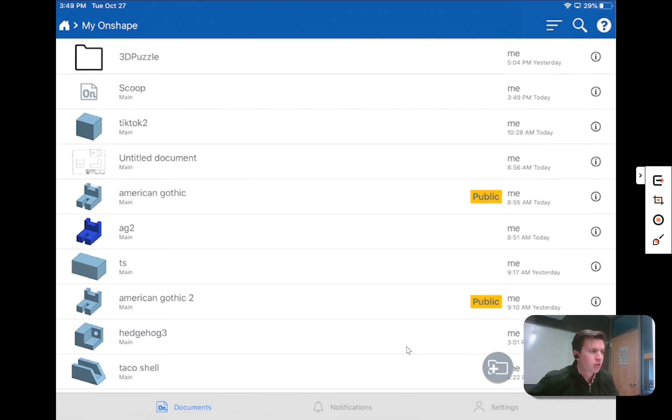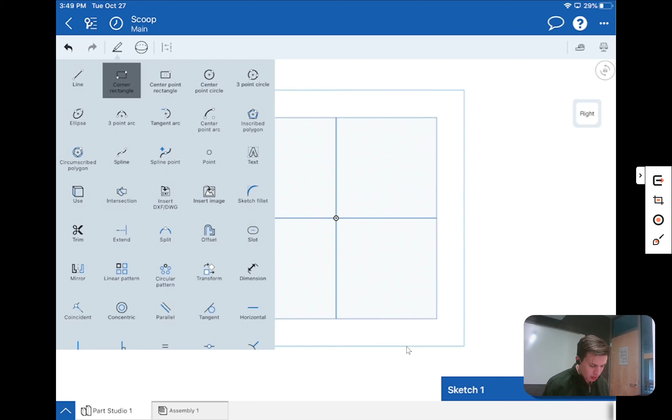So I am gonna start by drawing a big old rectangle, and I'm gonna draw that on my right side face, and I'll show you why in just a second. So let's start with our sketch tool and view normal to plane, and start with a rectangle at our origin and drag that out. All right, now let's refer back to the drawing so that we can get those dimensions.

So what I am drawing right now is this mystery rectangle right here. You see how it's just these light lines, meaning that they are only there as references. They are not visible lines, which are these dark black lines over here. So let's draw these. It is 2 and 1.75, and then extruded back a distance of 3.5. So let's go back over to our Onshape.

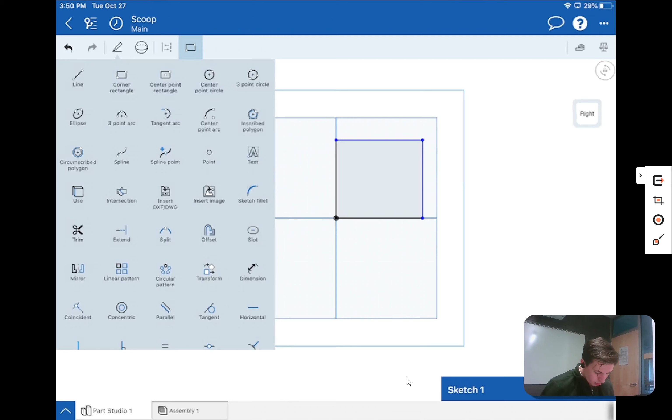And we had a dimension from here to here. Oop, not that dimension, Onshape. The dimension from here to here is a dimension of 1.75, and then our height is a dimension of 2. Cool, we'll finish that sketch, view isometric, extrude. Once again, I'm continuing to go a little bit faster through some of these steps that you've seen me do a bunch of times now. So we have this rectangle. I'm gonna turn off all these planes.

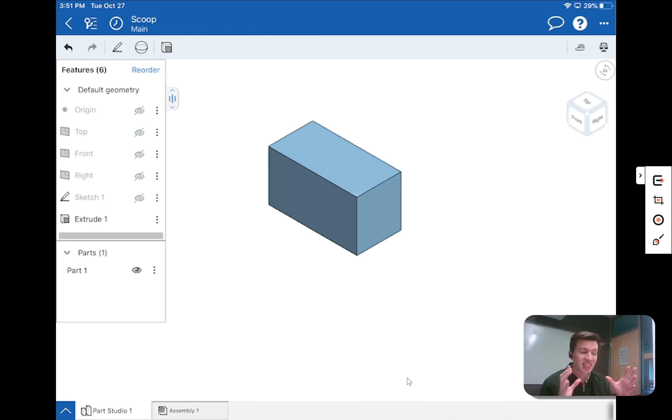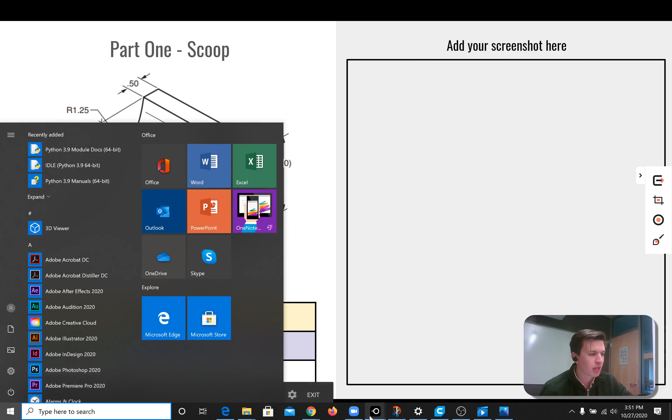Now, this is a part that some of you may have encountered inside of Taco Shell before, which is creating an angle cut. So what I am going to do, if we look over at this, I am gonna create this triangle right here, and I'm gonna subtract that triangle out so we get that nice slice to it. So let's take a look at how that looks inside of Onshape. So I'm gonna draw that triangle on this face over here. So I'm gonna start a sketch, and I'll view normal to plane.

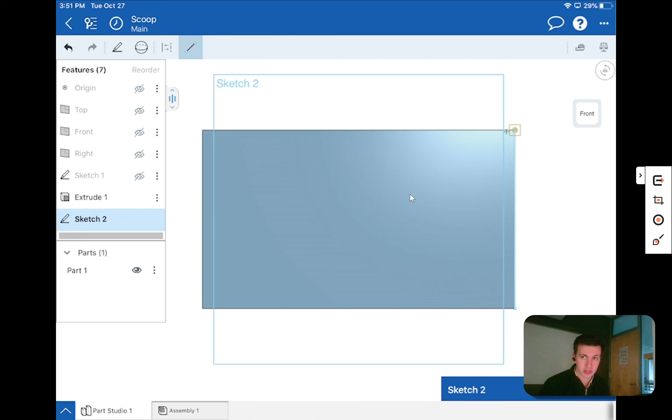To draw the triangle, I'm gonna take my line tool, and I'm gonna start at the bottom right-hand corner, and then drag that up until I see it snap orange over here. I don't want it to snap to this middle square, and I don't want it to snap to this edge over. So right here should be good. As long as it is not black and constrained at this point, we're good.

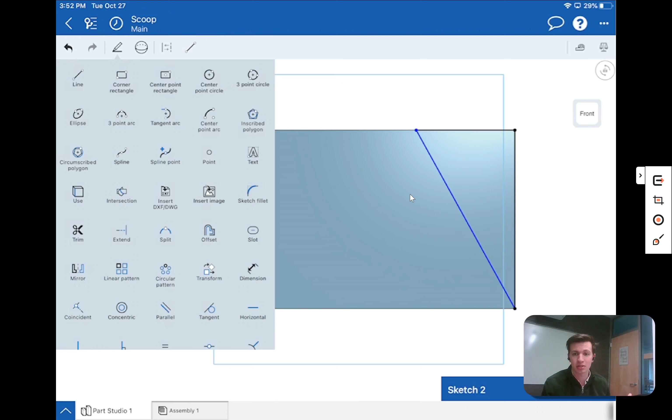All right, then what I'm going to do, I'm gonna finish up the triangle and just draw those lines right there along the outside edge, so we have a fully regioned triangle, meaning we can extrude just that triangle out and subtract it. So those lines that I just added were black because they're fully constrained. They're taking the dimensions from the previous sketch that I made. So now I want to dimension the angle.

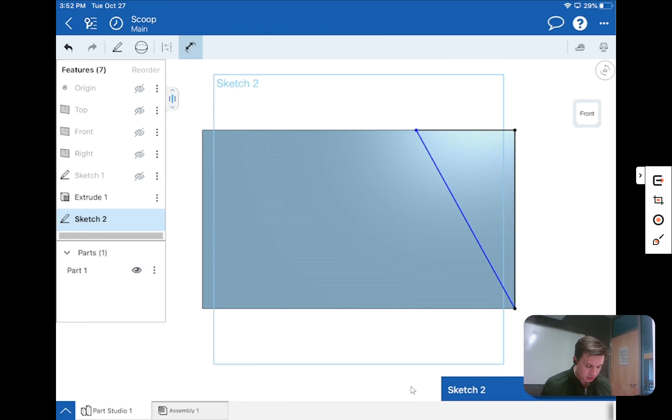And if we notice, our angle on our last drawing is this, the baseline to this line over here, and it's in degree of 60. So now if I go into Onshape and I select my baseline and this line, it's going to give me an angle measurement. So I will select that as 60 degrees, hit my check mark saying that I am done.

I'll view isometric, and now I am going to extrude that face out. So I'll remove it, and I'm gonna show you the end type. Over here, if I go to end type, I can say I want to extrude it symmetrically, so in both directions.

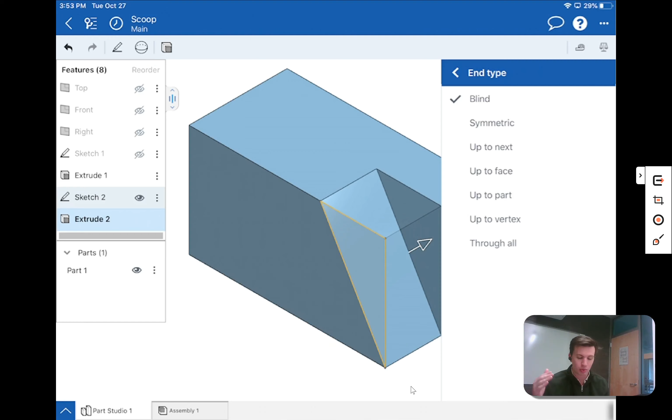I can go up to the next face, up to a certain face, up to a certain part, up to a vertex, or through all. And I can click that right there, and now I'm getting closer to the end of this drawing.

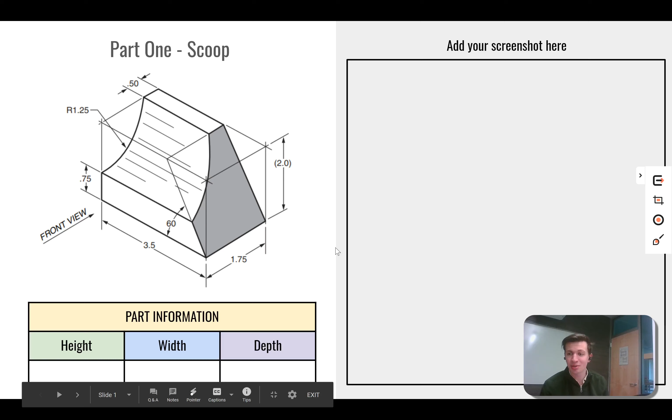All right, so let's take a look at the last thing that we need to draw, which is a semicircle. And this is actually something that came up on your assessment. You had to draw a semicircle if you wanted to achieve that level 4. So now we are going to learn how to do that, which is creating a semicircle. So right here, this stands for a radius of 1.25.

The radius is the distance from the center of the circle to the outside, not the diameter, which the diameter is fully outside. Now we use diameters to determine circles, but when we have semicircles, we use radius. So we are going to go from the center to the outside. So if we start at this point right here and go in 1.25, then we'll cut out the radius.

And you can check and see if this is our full dimension. So our 0.5 plus our 1.25 will give us a total of 1.75. And then 0.75 plus our 1.25 will give us a total of 2. So we know the center of this circle is right at the corner over here. So that's what I'm going to do. I'm going to draw a circle at the corner over here.

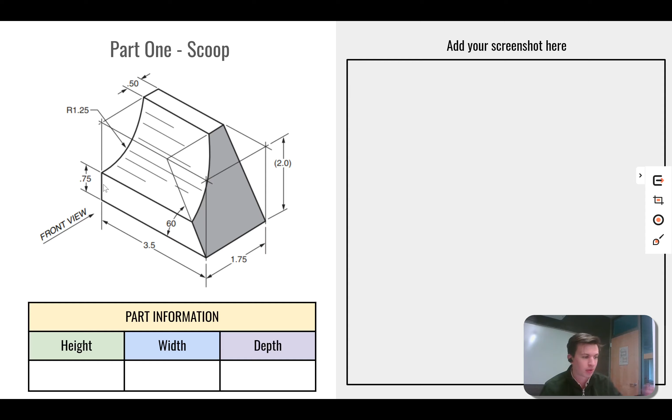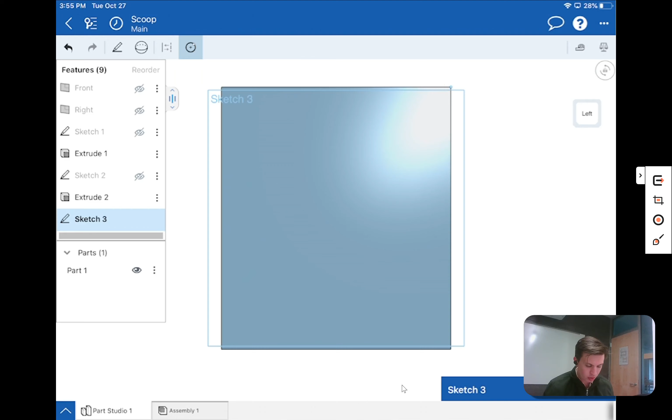So let's go back into Onshape. And I'm actually going to drag my drawing around so that I can draw on the back face over here. And I am going to view normal to, and I'll start my sketch. So just like I said, I'm going to take a circle using the center point circle, and starting at this corner, I will then drag it out, and I want to throw in my dimension. So I am just going to drag my dimension tool.

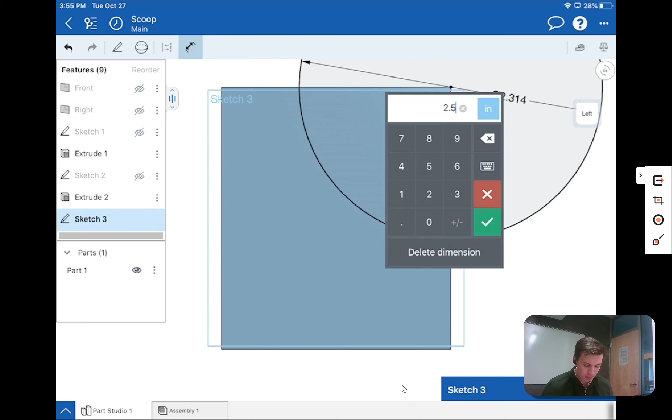Notice what it's asking for though right now. It has a circle with a line through it, which means it's asking for the diameter. So we need to specify a diameter that is twice the size of 1.25, which is 2.5. So there we go. We now have a circle that we can extrude out and subtract from it. But I want to just subtract out that corner part. And I'll show you how we do that.

One, I am going to take my line tool, and I am going to draw from the center of my circle until it intersects over there. And I'll do the same thing over here. And now that I have both of those lines, I'm going to teach you a new command. If we go into our 2D drawing tools, we have a command called trim. Trim allows us to remove anything that we don't need or extra lines.

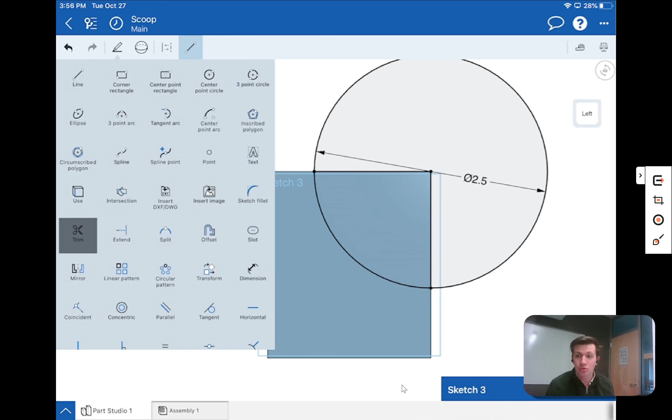So we'll click that. And if we go in space over here, notice what's highlighted when I want to trim this. It is anything in between those two lines that we just drew. So from this point all the way around to the other point, we can select that and it removes it. So now we just have our semicircle left.

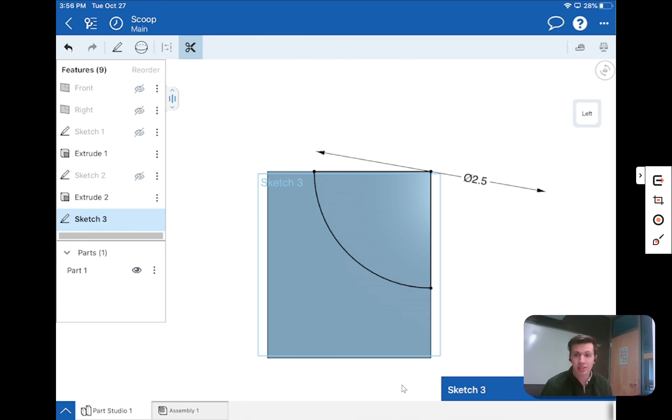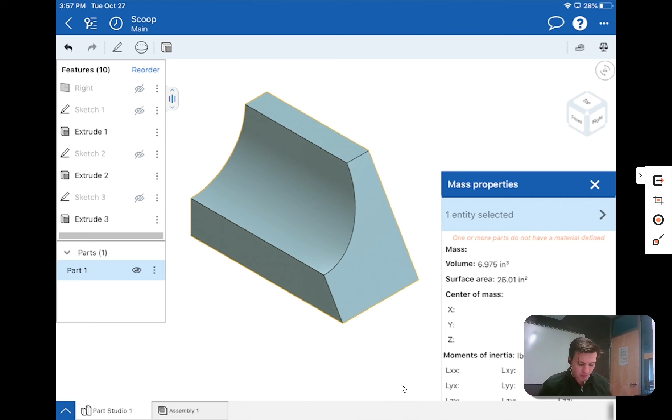So I can click the check mark, view my isometric view, and I am going to extrude our sketch number 3, this time removing it, changing my end type to through all, and clicking the check mark. And that is how you create scoops. So let's take a look at our mass properties. Right here, we should get a volume of 6.975 and a surface area of 26.01. All right, that's it.